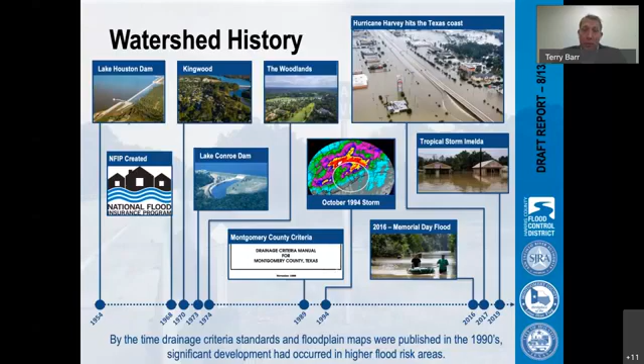Historical records go back in some areas about 100 years, but the last 25 years have produced several devastating storms to the residents of the San Jacinto watershed. The October 1994 storm was the storm of record for more than 20 years. With more than 18 inches of rainfall across the watershed, the elevation in Lake Houston increased over 8 feet from its normal pool elevation. The last 4 years have proven to be very challenging for residents of the watershed, with 3 major flood events causing disruption, property damage, and loss of life.

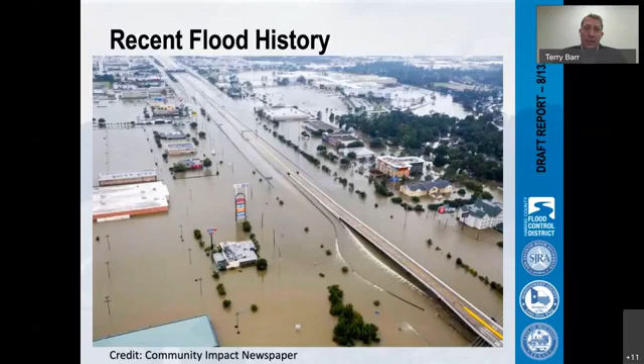The most notable of these events is, of course, Hurricane Harvey. In 2017, Harvey brought between 22 and 34 inches of rain across the watershed in a 6-day period. Rivers and streams throughout the watershed experienced record inflows and elevations during the rainfall event. Every major stream in the watershed exceeded previous record flow and stage elevations. Thousands of structures reported flooding in Harris and Montgomery and surrounding counties.

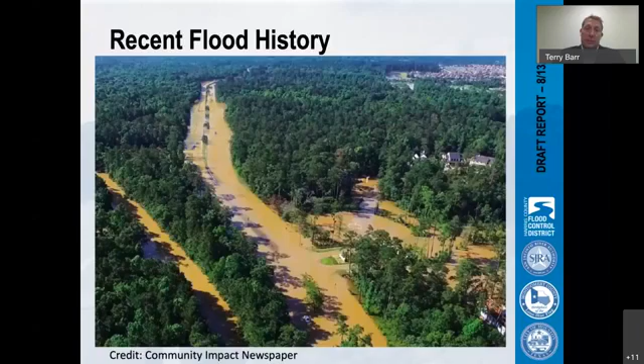Since Harvey, Tropical Storm Imelda has delivered another blow to the watershed, flooding homes and businesses that, in some cases, were still recovering from Harvey. The ultimate goal of this study is to identify measures that can improve resiliency in the San Jacinto watershed, improving flood mitigation, flood warning, and flood response.

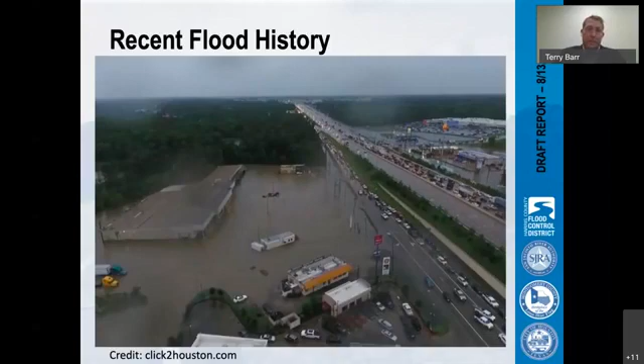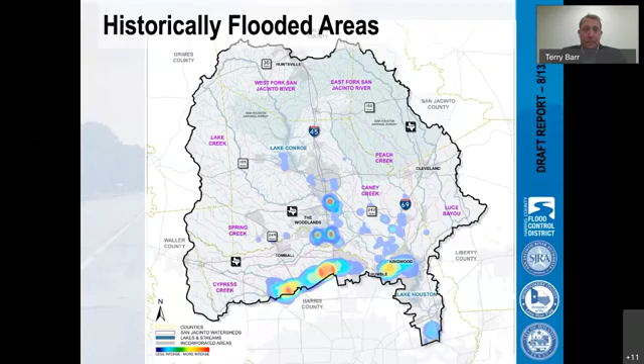Now, as I mentioned earlier, one of our goals was to identify vulnerability to flood hazards, causing both loss of life and property. This means taking an in-depth look at current drainage patterns using both detailed modeling and historical information. Complex computer models were prepared to help assess the watershed's vulnerability to flooding. The models developed used the most recent Atlas 14 rainfall data, digital terrain information, and modeling technologies to provide an understanding of the San Jacinto watershed.

The study team developed a single comprehensive model of the San Jacinto watershed streams, the first of its kind for the region. In addition, the study team compared the models to 4 historical storms, including Hurricane Harvey, and made adjustments to improve the accuracy of the models and ensure a realistic representation of the watershed. Developing these models was a critical part of the planning process because it allowed the team to identify current flood risks and set a baseline for comparison. Each flood reduction project that was considered is measured against this baseline conditions modeling to determine if it's going to reduce flooding.

The result of the baseline conditions modeling is a significant amount of information that can be used to identify flooding locations and sources. One set of products is the flow and patterns of the watershed. This information gives the team an understanding of how much runoff accumulates and where it goes. This product is also used to develop flood inundation mapping and flood profiles, which can help us assess which buildings and structures are most vulnerable to flooding in the watershed. In general, the modeling indicates that structures within the floodplain are at a higher flood risk than shown in the FEMA flood maps. This is largely due to having more accurate rainfall data and better modeling information.

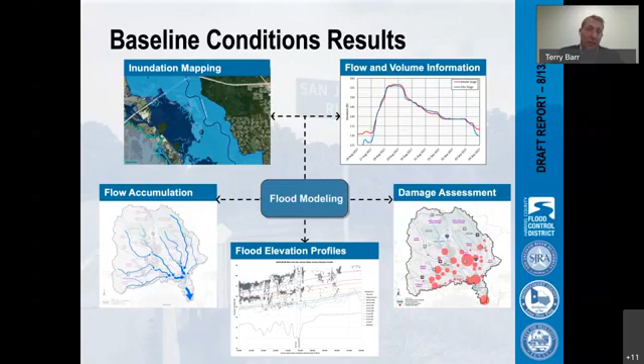Now, as I mentioned, the modeling helps us understand flow patterns and flow accumulation in the watershed. The arrows in this map show the direction of flow in the stream, and the size of the lines represent the peak flows experienced in a major storm. A larger line indicates a higher peak flow. The San Jacinto watershed collects runoff from 2,840 square miles and funnels it through Lake Houston.

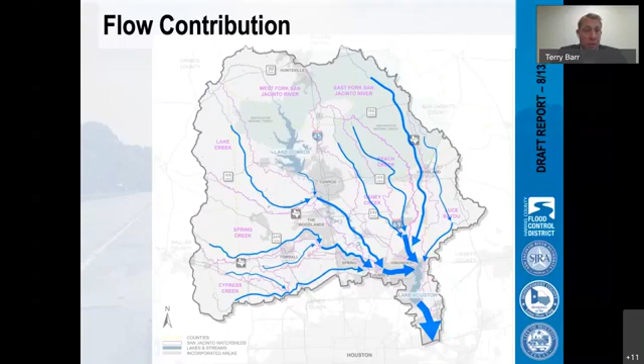Our analysis shows that flows in the downstream portions of the watershed can come from several sources. Spring Creek, the West Fork, and the East Fork receive a tremendous amount of flow from both their own watersheds as well as others upstream. For example, the East Fork also receives flow from both Caney Creek and Peach Creek. These additional flows can contribute to flooding on the East Fork. Understanding flow sources and accumulation can also help determine where potential improvement projects can make the greatest impact. With significant portions of the watershed flows coming from Spring Creek, Lake Creek, the West Fork, Peach and Caney Creeks, and the East Fork, projects in those watersheds have a higher potential for reducing flows downstream.

So the first step is to identify where we see the highest flood risks. The study team used the baseline modeling that I was just talking about to determine the number of structures that are expected to flood for the next 50 years if there are no changes. The number of potentially flooded structures, such as homes, businesses, and other facilities, vary throughout the different sub-watersheds within the San Jacinto watershed. The team used property data and standard practices to calculate the expected damages over the next 50 years in millions of dollars. Spring Creek, the West Fork, and Cypress Creek are the watersheds with the highest expected damage numbers, which is unsurprising given that they are more developed than some of the other watersheds.

Using the calculated damages I just mentioned and historical floodplain data, the team identified 48 different damage centers. These are areas where we see clusters of flooded structures for a range of different flood events. Identifying these damage center areas helps the team focus on areas and projects that have the most potential for flood reduction.

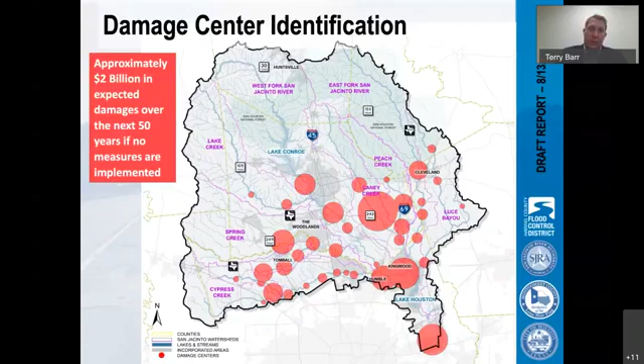So, how do we begin to address the flood risks in the watershed? The main focus of the SANJAC study was to evaluate and recommend flood mitigation strategies aimed at just that. One of the goals of this study is to develop flood mitigation strategies to improve long-term resilience. Flood mitigation planning focused on ways that we can physically reduce flooding or remove people from flood risk.

Following a watershed-wide approach, we identified and evaluated projects that had been previously shown in prior studies and recognized new flood reduction projects. Flood warning planning focused on flood warning capabilities in the watershed. The team coordinated with several agencies about their interest in gauges and made recommendations for installation of new gauges at additional locations.

Flood response planning focused on potential improvements that could be made to the current emergency management response and the information available to emergency responders and the public. As part of this process, we coordinated with emergency management agencies about their procedures. We provided some recommendations for improvements, and we identified potential roadway and critical infrastructure flooding. This collection of strategies makes up the San Jacinto Regional Watershed Master Drainage Plan.

Now, with respect to large-scale flood mitigation efforts, the focus is really on two primary approaches: detention storage and channel conveyance. Detention storage is accomplished with regional detention basins, which are man-made impoundments that capture runoff, hold it, and then release it at a slower rate. This results in lower flows downstream and subsequently lower water surface elevations. Note that these are not lakes. These are dry detention facilities that would only hold back water during and immediately after a storm event.

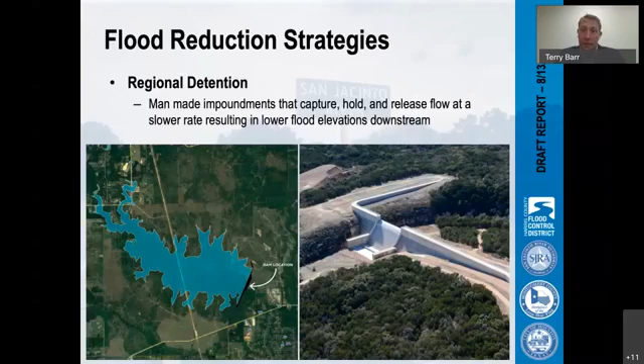Channel conveyance increases are accomplished through channel improvements. Excavation in the channel allows for more flow capacity and lower flood elevations. Channel improvements can provide significant reductions in flood elevations in the immediate project area.

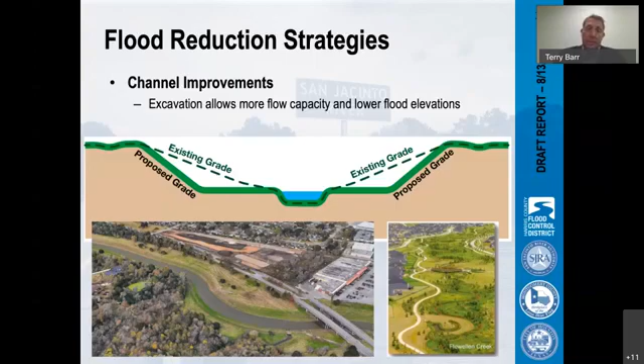Using both of these strategies, the study team analyzed 25 projects across the San Jacinto River watershed. Of these, 16 were included in the long-term flood reduction plan. These are shown in red and numbered. The plan includes 10 large regional detention facilities, comprising approximately 229,000 acre-feet, and 6 channel projects covering about 38.5 stream miles. The overall plan, based on our current cost estimates, costs between $2.9 and $3.3 billion.

And while that is a high price tag, consider that the watershed covers a few thousand square miles, and there is no single simple solution that's going to address flooding across the region. A series of large-scale improvements is needed to reduce the risk.

So if you look at the flood reduction with the proposed projects, there's about a 44% reduction in the number of structures at risk of flooding in the 1% annual chance event, or ACE. This is equivalent to the 100-year storm. And there's more than a 40% reduction of at-risk structures for the 2% and 4% ACE storms. Those represent about the 50 and 25-year storms.

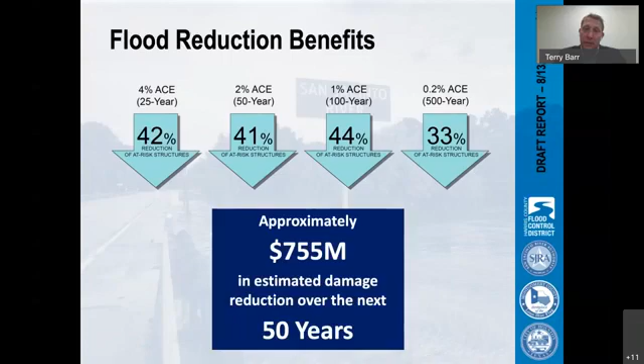Those are significant reductions. The 0.2% ACE or 500-year reduction is approximately 33%, but consider that the 0.2% ACE flood elevations exceed Hurricane Harvey levels by a noticeable margin. Constructing the recommended projects will reduce flood damages by more than $755 million over the next several decades. In addition, flood-prone property and roads could be protected, and long-term economic benefits may result from the flood reduction.

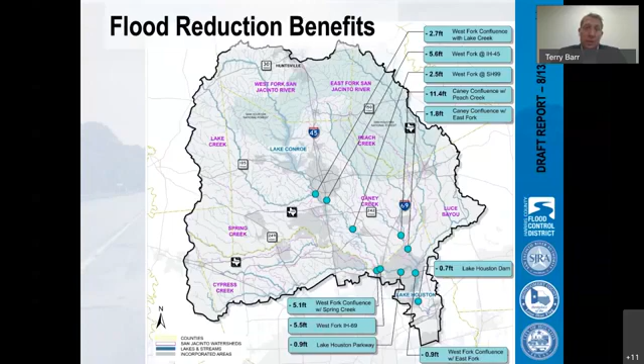There's also a substantial flood elevation reduction along major evacuation routes like I-45 and I-69 that could improve mobility during a major event. The map shows water surface elevation reductions across the watershed after all the recommended projects are implemented. You can see that in many areas, including major roadways like I-45, I-69, and State Highway 99, you would see a substantial reduction for the 1% annual chance event or 100-year storm.

Beyond the structural project component study, we also considered regional policy. While our study did not perform significant analysis to provide data for various policy components, our recommendations do speak to the importance of policies such as detention and floodplain preservation. It's important to note that local detention is a critical flood mitigation tool for development and capital projects. The future growth projections we used from the Texas Water Development Board and the Harris-Galveston Subsidence District showed development expanding around the current urban centers over the next 50 years. Modeling these projected changes in development shows that detention keeps flows from increasing as development occurs.

It's also important to note that drainage does not consider political boundaries. With that in mind, the study recommends that consistent detention policy should be implemented throughout the watershed for any projects that increase flows. The study also recommends that a comprehensive impact analysis be performed for any project that might affect the same flows. The analysis should look beyond the property limits and as far downstream as possible. The models developed as part of this study could facilitate such an analysis all the way downstream of Lake Houston.

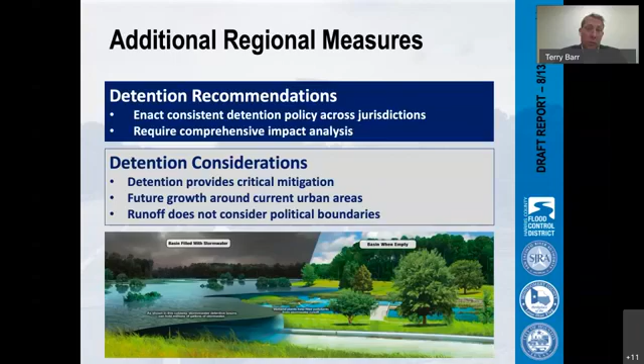Floodplain preservation is another important measure to prevent increased risk of flooding as the region grows. The best way to protect people and property from flooding is to avoid building in flood-prone areas. It is well known that building in the floodplain can create negative impacts upstream and certainly downstream of the site. That being said, preventing landowners from developing in the floodplain may not always be a feasible solution, and the cost of acquiring right-of-way can be very high for public entities.

The estimated property value in the 100-year floodplain, just along these major streams in the San Jacinto watershed, is between $2 and $3 billion based on our current appraisal data. The study recommends consistent policies across the various jurisdictions in the San Jacinto watershed that encourage limiting development in the floodplain, acquiring floodplain property when it's available, and requiring that fill placed in the floodplain be mitigated so that adverse impacts can be avoided.

Another option is buyouts. As we were performing the study, it quickly became apparent that while the recommended projects can provide a substantial benefit, many structures will still be at risk of flooding given their location and elevation. Structures at risk from inundation during the 50% or 2-year and 20% or 5-year storm events may see a reduced frequency of flooding, but will likely continue to flood during major events. In some cases, it is more cost-effective to buy out frequently flooded properties.

Just as a point of reference, we estimate that buyout costs of structures at risk from the 50% and 20% ACE storms, just along these major streams, is about $190 million. Now, we certainly realize that there is more to buyouts than just cost, because these are people's homes, people's businesses. But a comprehensive buyout strategy that includes communication with property owners is an important step to eliminating some of these flood risks.

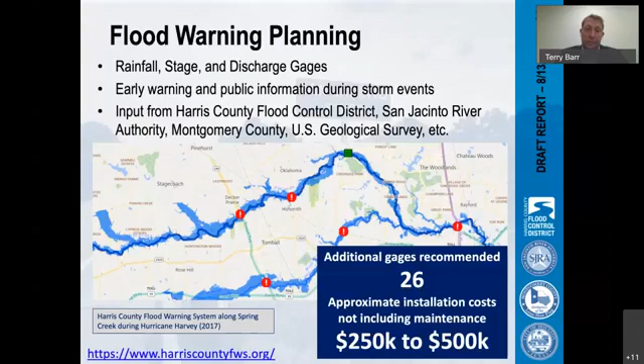Flood response planning included several tasks aimed at evaluating current emergency management procedures. The study team met with emergency managers from across the watershed and discussed their current communications protocols, both internally and public. We also looked at the potential for flooding of critical infrastructure and roadways, some of which are necessary evacuation routes. We also conducted a workshop with emergency managers to discuss these important topics and gain further insight into flood response needs. What came out of the study are recommendations for improvements to documentation and staffing, communication, both internally and with the public, flood monitoring capabilities, and public education.

Our investigation of critical infrastructure focused on city and county facilities, police stations, fire and EMS stations, public works facilities like water and wastewater treatment plants, hospitals, and other such facilities. Of the 1,460 facilities that were classified as critical in the watershed, 239 of them are potentially at risk from flooding during a major storm like Hurricane Harvey. Finally, an evaluation of roadway flooding throughout the watershed looked at all types of roadways, including those classified as evacuation routes. The study findings show that 4 potential evacuation route crossings may be susceptible to flooding during a major flood event.

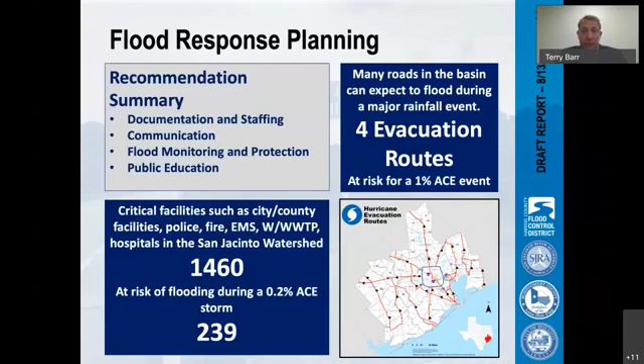One additional component that was included in the study was a sedimentation and vegetation plan. Now, this was not a comprehensive evaluation, but rather a review of existing data, and recommendations for future analysis. As part of the analysis, the team developed annual sediment rating curves for the 7 major subwatersheds in the San Jacinto watershed. Now, as I said just a second ago, this is not a comprehensive study, but a first step toward a regional sediment management plan.

The study prepared an inventory of sediment sources and identified a series of common sediment management strategies to be investigated and potentially implemented. Our investigation found that sediment has been steadily deposited in Lake Houston since the dam was constructed in 1954. The recent U.S. Army Corps of Engineers dredging project has removed approximately 3% of that deposited sediment. In addition, historical stream gauge data indicates that the majority of sediments are contributed by Cypress Creek, Spring Creek, and

the West Fork. The report also identified nearly 50 sediment management strategies that could be employed, including sediment traps, stream restoration projects, sand mines, and more. Recommendations were made for several of these sediment management strategies along the West Fork and Spring Creek. The next step is to complete a regional sediment management plan with more detailed sediment transport and volume analysis, and to identify new stream gauge locations to pinpoint sediment sources. For the potential management strategies, feasibility studies for potential pilot projects and additional analysis of dam complex, sediment tunnels, and stream stabilization need to be performed.

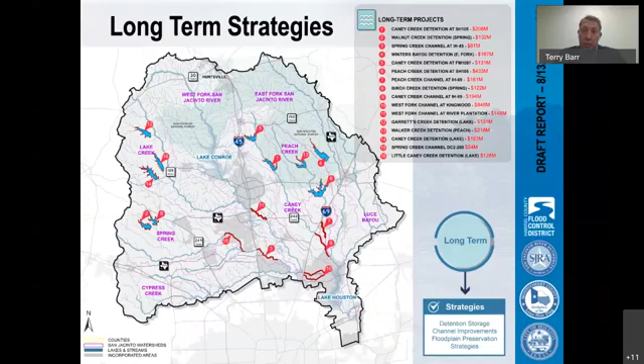The 16 projects were ranked based on a variety of factors. The resulting rankings provided a good distribution of projects across the watershed, making this a truly regional plan. The study team considered a variety of project scoring criteria to make this a regional plan. We looked at historical floodplain as well as flood damages identified in our modeling. We also gave significant value to flood reduction benefits, such as how many homes can be protected. The study team also looked at costs and possible funding sources. In addition, we looked at social factors, such as low to moderate income areas, to ensure that we were providing access to flood reduction for all areas in the region.

Using these criteria, the team scored and ranked each of the projects. This ranking sets the order for projects. Now, let's think about that last statement for a minute. I think it's important to note that the San Jacinto Plan is intended to be a living document. These rankings are based on current conditions and assumptions, but we live in an ever-changing world. Rankings will need to be constantly reevaluated as conditions change. Another important consideration is that the ranking does not lock any given project into that order. Factors such as funding opportunities, different project champions, and changing needs in the watershed make it likely that the order will change throughout the life of the plan.

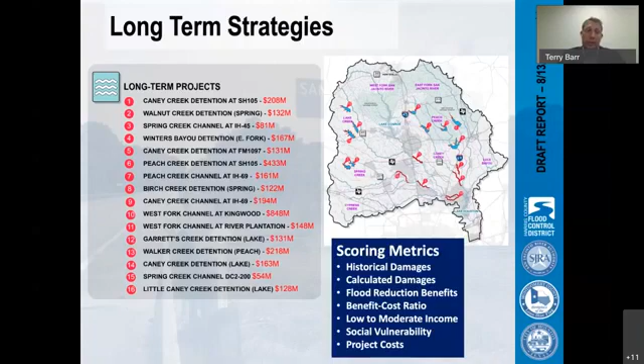Ultimately, the plan is to select the current top projects and move forward with project development. This includes securing funding and performing a detailed feasibility and preliminary engineering. The SANJAC study represents an important first step in the project lifecycle planning, which lays the groundwork for future success.

The second step is project definition. Definition phase includes identifying the agency and consulting teams who develop the projects, identifying and securing funding for the project, and additional feasibility and preliminary engineering to really clarify and nail down what that project's going to be.

The next step is the project construction phase. This includes acquiring the land and easements needed for the project, developing the construction drawings, identifying and securing any environmental permitting, and project construction. Once the projects are in place, continuous operation and maintenance of each project is necessary to ensure that it continues to function as intended to provide the maximum flood reduction benefit.

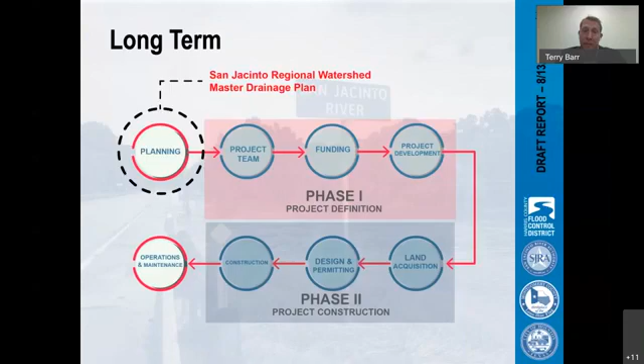Funding is one of the most important considerations to the recommended projects. Each project is a significant investment and will require a number of steps in order to develop, acquire the right-of-way, address environmental concerns, and construct the project. There are a variety of funding sources that could potentially be leveraged to pay for parts of each of these projects. Federal agencies such as the Federal Emergency Management Agency, Housing and Urban Development, the Natural Resource Conservation Service, and the U.S. Army Corps of Engineers can provide funding through a variety of programs.

Also, potential funding sources at the state level, including the Texas Water Development Board and the General Land Office. Flood protection grants and the new Flood Infrastructure Fund are both available through the Water Development Board. As I mentioned earlier, the state flood plan process is just beginning. The inclusion of this study and its recommendations in the regional plan will be a key in making these projects eligible for state funding. Local funding through general tax revenue, bond elections, and private investment through partnerships with public agencies are all options that could help push these projects forward as well.

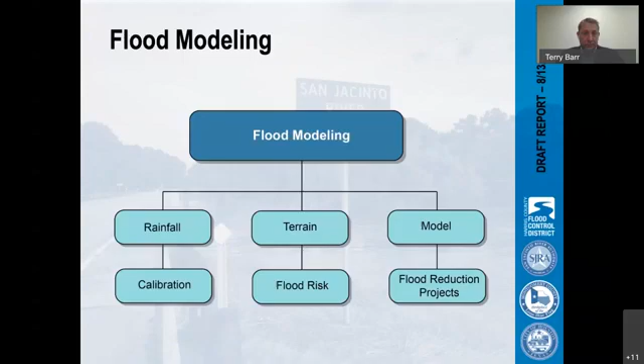Thanks so much, Terry. I did also just want to note that we're getting several questions about different pieces of this area. And obviously this is an expansive area that we're studying. I do want to reiterate that we're going to try to stick tonight to a high-level conversation about the study itself. So while there are specific areas that folks may have questions about, those will be followed up with after the meeting, just to make sure that we are staying on topic tonight and addressing the questions that have the greatest impact and relevance to the full area.

Jing, I'm going to send our next question to you, and it's from John Stacy. Channel conveyance improvements sound a little outdated, perhaps. How can we focus on protecting wetlands and removing risk structures from inappropriate areas? Can you talk about how some of those considerations were incorporated? Yes, sure. Thank you for that input. As Terry mentioned, there are buyouts that are recommended for some of the more frequently flooded structures within the floodplain. For those that are in the 2-year and 5-year floodplains, we're recommending buyouts, and that will help preserve the conveyance capacity of the channel.

And also, there are opportunities to implement some natural stream improvements that are non-concrete lined. Those are likely going to be explored further into the design process. As Terry had also mentioned, we're in the planning stage right now. So as some of the projects obtain funding, they will move into preliminary engineering and design. And so that's a good concept that the design teams will keep in mind.

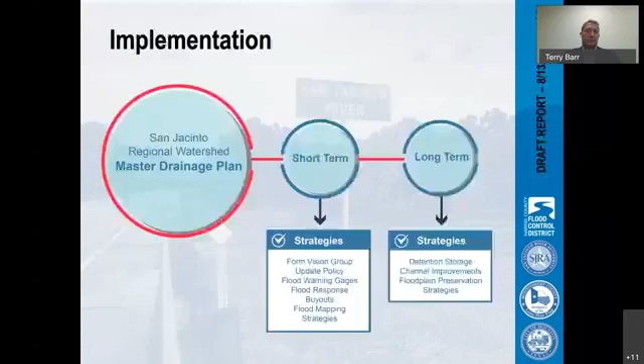Perfect. Thanks so much, Terry. That's helpful. Adam, I'm going to move our next question to you. Can you give us a little bit of an update on the project to add more gates on Lake Houston and talk about the timeline for that project?

Sure. So we're in the evaluation phase. The team is moving along very quickly. The design team has done a number of things to facilitate condensing that schedule. So we're evaluating the different alternatives. We're looking to have those alternatives wrapped up by the end of the year, and we can move into final design.

Final design and the ultimate configuration and location of the gates will impact the permitting through the Army Corps of Engineers and FEMA, and the permitting process will then impact the construction schedule. So again, we're looking to wrap up the actual design as quick as possible. But as I said at the Kingwood meeting at the end of last year, the actual construction of the gates is dependent on environmental permitting questions.

Perfect. Thanks so much, Adam. And thanks to James and Sherry for that question. I do have a follow-up from Joe Coleman. Do you feel that those corrections are enough to remove excess water from the watershed? There's a concern that if we put more water into Lake Houston, that could potentially cause more flooding.

So part of that, we're incorporating the findings of this study and the model that was prepared for this study into that analysis. So we are looking at the current inflows into the lake from the entire watershed and looking at, again, moving enough water out to make sure that there's no adverse impact, that there's no flooding. So yes, we are evaluating all the inflows from both the East Fork and West Fork, everything coming into Lake Houston, and going to design the gates to move water out so that flooding does not occur.

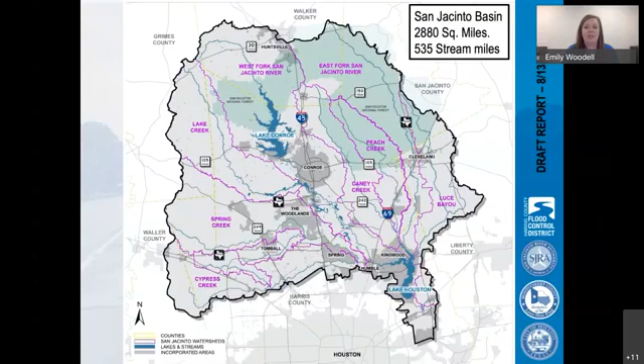Dina, I'm going to come to you for our next question, which is from Carolyn Carruthers. Have any bond measures or funds been approved for this project? And are there any construction plans finalized? Sure. So the recommended projects in this plan will be future projects. So they won't be funded with the 2018 bond program. However, we do have several bond projects within the Harris County portion of the San Jacinto watershed that are included in the 2018 bond program. We've got projects in Cypress Creek, along Spring Creek, some in the Kingwood area, and many, many others. There's more information about where those bond program projects are located on the Flood Control District's website.

So while Terry did mention these are large regional projects recommended by this study that would need to have additional funding gathered in the future, Flood Control does have additional bond program projects that were not mentioned in the presentation this evening. Perfect. Thanks, Dina. And I'm actually going to stick with you for a quick follow-up question. I think we've all heard a lot about the bond program and what it means for Harris County. Can you talk about how this fits into the overall goals and spirit of that and how we're really moving that forward?

Sure. Well, a lot of the bond projects really are intended to mitigate flood risks and help build resiliency. And one of the major products that we've received from this project is having that collective set of models that Terry talked about earlier. Having the ability to understand what these major channel systems are bringing to Harris County and what we can expect to see during large storm events. So having that data pulled together and developed consistently and cohesively gives us a really powerful tool to understand what flood risks are coming towards our county from north of us. Thanks so much, Dina. Always helpful to see the big picture.

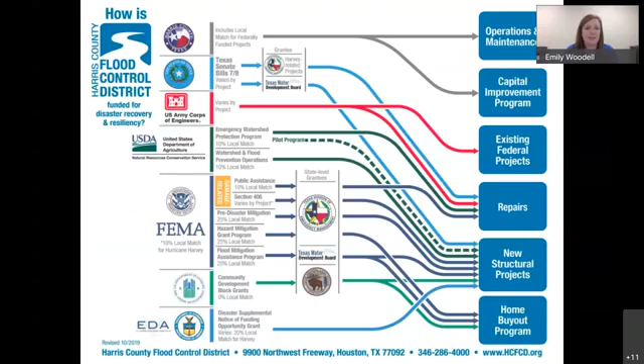Terry, I'm going to come to you next. We have a question from Jill Bullion. Were nature-based projects considered? And if yes, which ones were considered and how were they assessed? So I will tell you that at this scale, they were not specifically looked at. At this scale, we're really looking at an order of magnitude. What would it take to affect significant reductions in water surface to remove people from flood risk or reduce their flood risk? So we're looking at a very high level, and then based on those results and costs and social factors and all those other things, we're providing a general range.

Now, I think there's a couple things that get back into the natural aspects that you're asking about. One is the policy consideration for floodplain preservation. It is definitely our recommendation that we try to preserve as much floodplain as possible for the very reason that I talked about, which is, putting people into the floodplain puts them in harm's way and increases damages.

So that's one aspect. The second is that, as these projects move forward and they get selected and they start moving forward with development, that is an opportunity right there to look at specifically what's that project going to look like and what are some of the things that we can do to maintain that natural environment, or to do something like natural stable channel design and really focus on some of those environmental aspects.

With respect to the detention basins, these are really just impoundments at this point. The recommendations are really about impounding water, but keeping everything else kind of in its natural state. So the intent here is not to go in and excavate these large areas. It is to impound water along the natural stream so that we can maintain as much of that existing natural environment as possible.

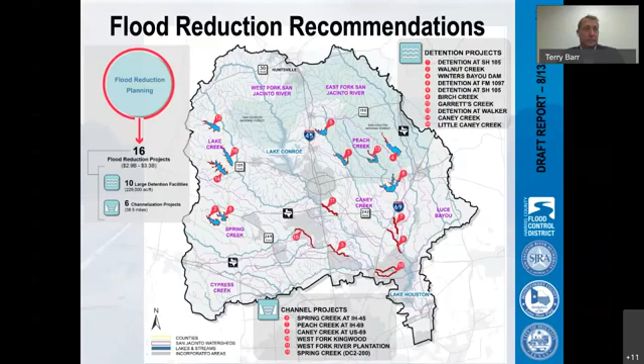Thanks so much, Terry. Great answer. And we did have a comment, just kind of as a follow-up to that, come in from Becky Martinez with the Bayou Land Conservancy, talking about some conservation easements that they have in place. And I think this is a great example of why this type of community engagement is so important. Sharing these types of opportunities and flagging these types of potential collaborations is wonderful and helps us to look at a holistic picture when we're presenting these types of projects.

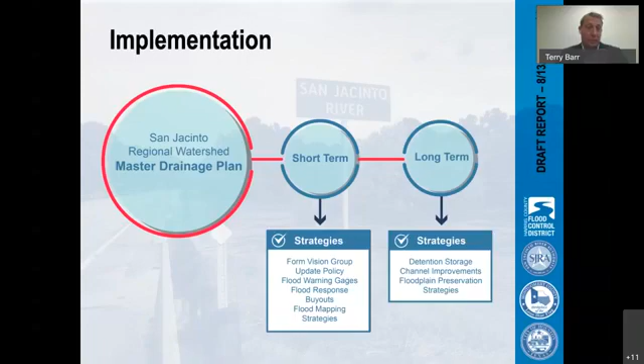These projects, there's a lot to do, and it is a multi-jurisdictional effort. And so I think having a group like this regional flood planning group spearhead this vision for this particular watershed is going to be an important part of that. So as soon as those groups are formed, getting this study in their hands and being involved, helping them in any way we can to try to move this process forward, I think is going to be the big next step.

Thanks so much, Terry. And to that end, Matt, I wondered if you wanted to hop in and just talk a little bit about what SJRA is doing. Sure. Yeah, in addition to all the work and projects that Harris County Flood Control is doing on flooding throughout the region, SJRA's got several efforts underway, and also several things that we are applying for funding for. Specifically to some of the recommendations or results of this study, we put out a grant application for a couple of the reservoirs that have been recommended by the study team in the Spring Creek watershed.

We also have an ongoing project related to installing some sediment removal infrastructure along the San Jacinto River, applying for grants for the next phase of that. Also applying for grants for a regional sedimentation study, which was one of the recommendations coming out of the Sedimentation and Vegetation portion of this effort. And then also just looking forward to being a part of the regional flood planning group that's been mentioned tonight, and continuing to work with flood control and other entities on any projects in the basin that we can. Thanks so much, Matt. That's helpful.